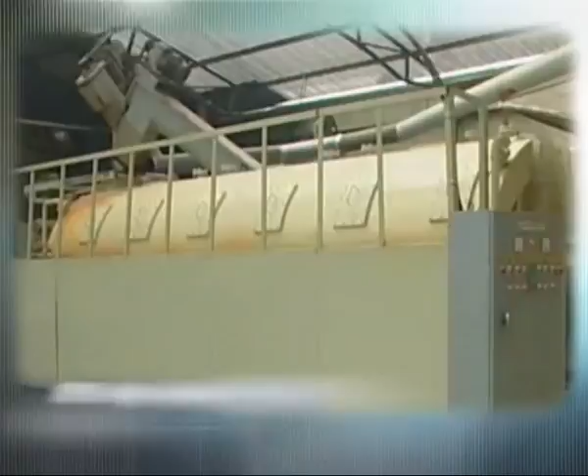ERS is an environmental recycling system that efficiently turns waste into multiple resources with commercial value. This high-speed composting, fermentation, and drying system converts waste into value-added products such as fertilizer, animal feed, and even raw materials for concrete within a few hours.

The main ingredient in this system comes from these tiny microbes. ERS harnesses the power of specific aerobic microbes that are collected from the local soil in the area. This is to ensure that the recycled waste matches the eco-conditions of the surrounding area.

With the use of these specific microbes, ERS is able to compost waste into fertilizers within 2 to 4 hours, compared to the conventional way of 6 weeks.

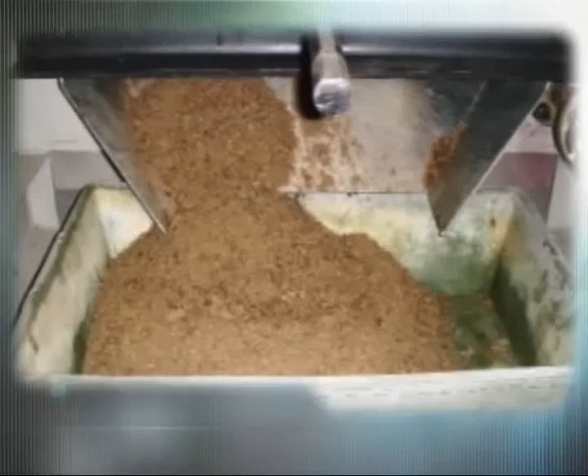The microbes are multiplied and stored in an ERS reactor. The reactor uses a pressure and temperature-controlled environment to create an ideal condition for the aerobic microbes to multiply exponentially, thereby decomposing the organic matter and evaporating moisture in just 2 to 4 hours. This is compared to conventional composting, which takes over 1,008 hours.

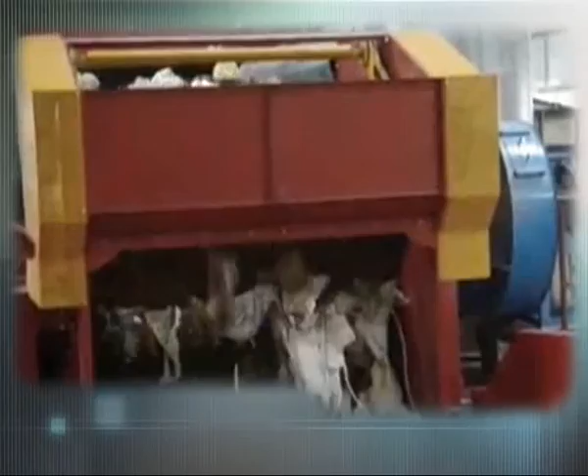To understand how revolutionary this patented technology is, we need to gain insight into the conventional treatment of waste in a typical town. Mixed waste is separated into organic and inorganic matter.

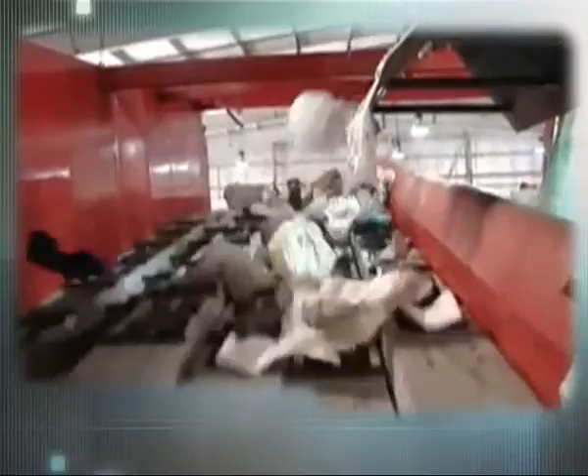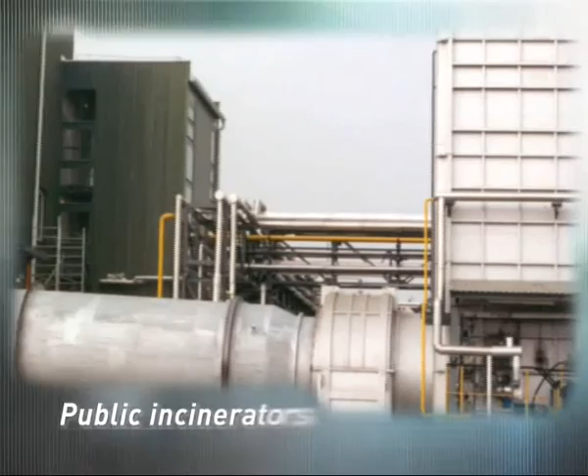After being crushed in a hopper, the solids and liquids are separated. Solid waste is sent to landfills or public incinerators. This might contaminate the land and releases greenhouse gases into the air. Burning the waste also takes up a large amount of energy.

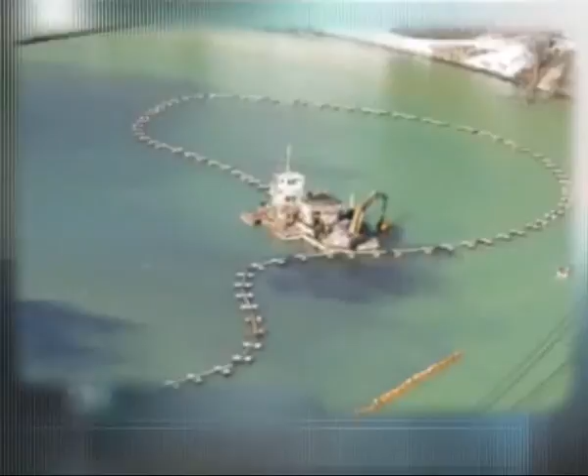In some cases, the liquid waste is dumped into the ocean. This leads to contamination and toxic trace chemicals being released into the marine environment.

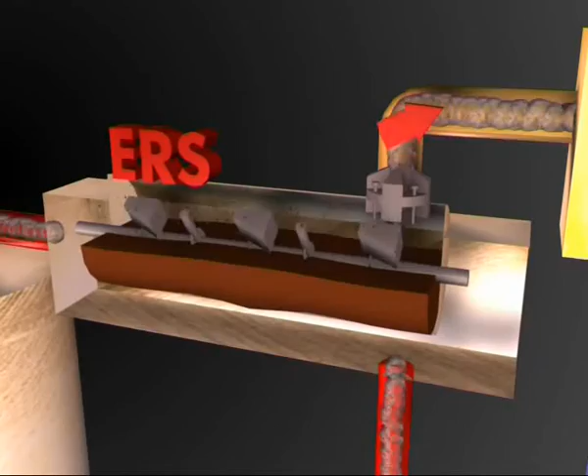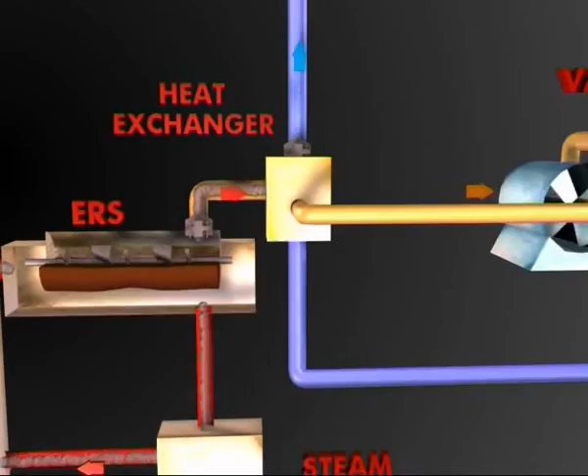Using the simple and compact ERS, both solid and liquid waste can be treated at the same time. The microbes digest the waste, turning solid matter into fertilizer or animal feed. Water content will be recovered by the heat exchanger and used back in the system's cooling tower. No odors are released, and energy costs are kept low by recycling the fermentation heat.

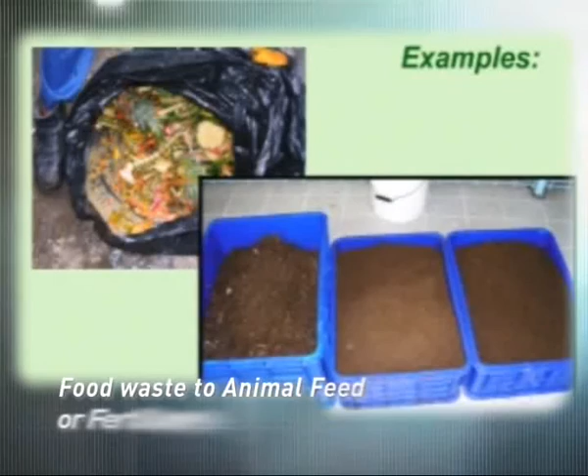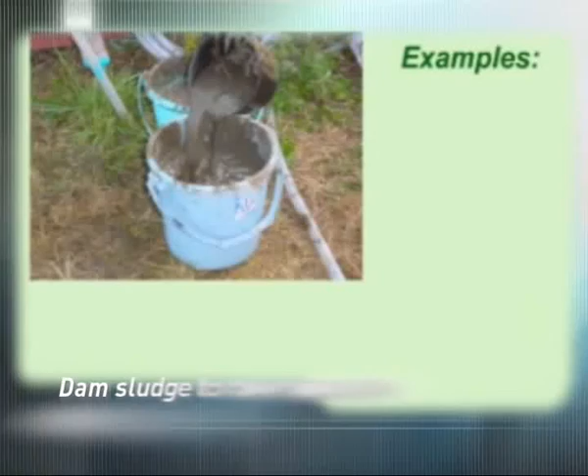This technology has already been applied in many countries, from turning kitchen waste in hotels into fertilizers for hotel landscaping projects, to converting sediment built up in hydroelectric dams into raw materials for cement, to channeling tons of unusable fish waste that could pollute the seas into high-protein aquaculture feed.

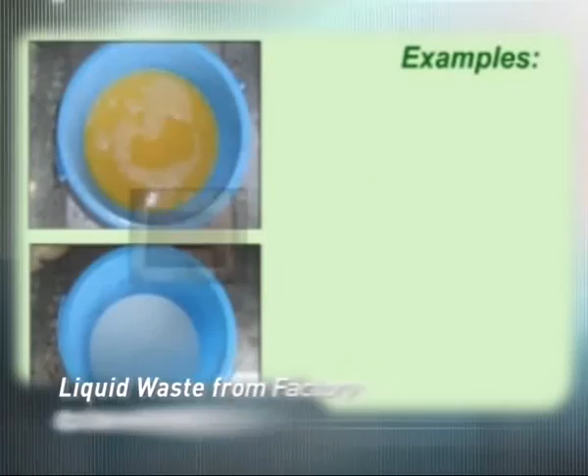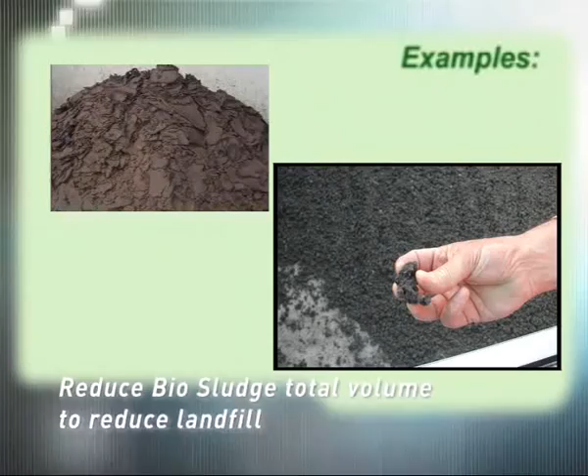ERS delivers benefits not only to consumers, but to the planet at large. There are no discharges to air, land, or water. The plant is hermetically sealed and all process emissions are recovered and then recycled, leaving no residual substances such as greenhouse gases and odors.

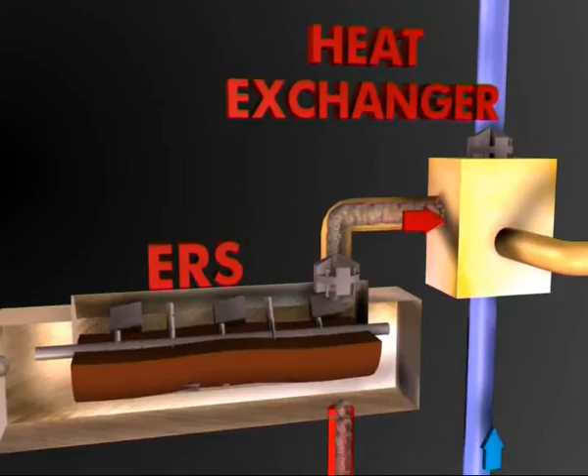Energy from the fermentation process is recovered and used in the drying process. Wastewater is recovered as coolant in the cooling tower as well.

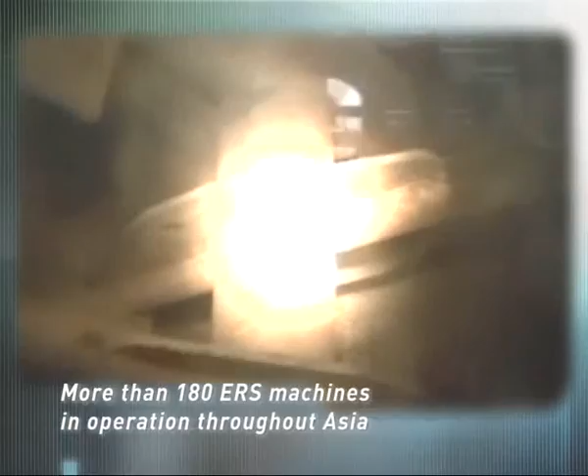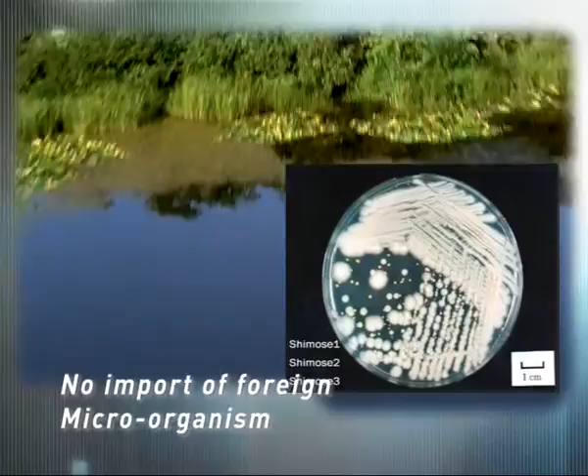Since 1993, over 180 ERS machines have been in operation throughout Asia. This is because of its simple structure and a one-push control button. Only motors, pumps, and some other rotating device require maintenance. No microorganisms or bacteria are brought from abroad, and all the processes are undertaken under local conditions. This minimizes environmental problems caused by bacterial contamination.

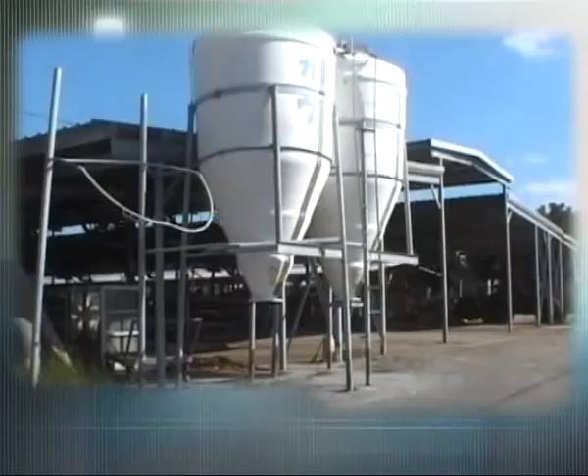Non-hazardous waste products are processed to create valuable byproducts. In the dairy industry, one of the proven applications is the conversion of indigestible hard fibers from sugarcane waste into digestible fiber feed. This improves palatability of feed, increases feed intake, and speeds up the growth of dairy cows, as well as improves milk production. It also significantly reduces concentration of harmful gases, creating an odorless and perfect breeding environment.

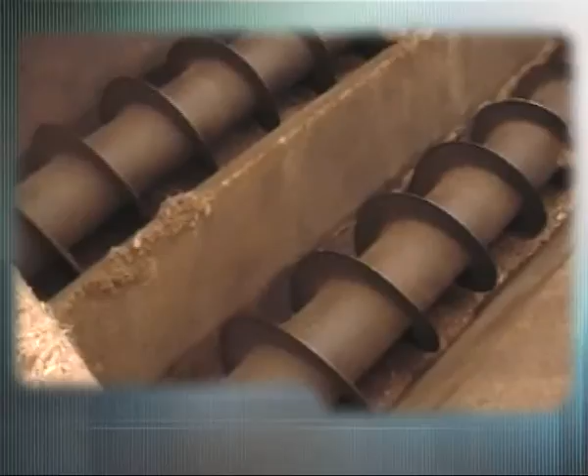ERS technology has been tested and proven in producing bioproducts, and in recognition of this, Okinawa Dairy Farm Association has agreed to purchase all animal feed produced by the ERS system.

By finding new uses for and giving additional life to products and materials that would otherwise burden our landfills and pollute our skies and water, ERS has proven that it can solve one of the biggest problems facing the planet.